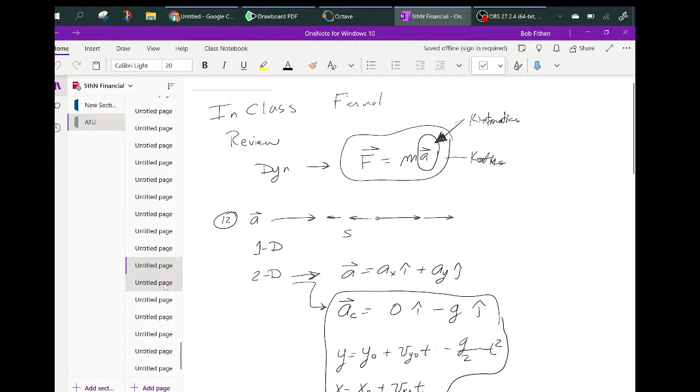The review had to do with centroid and moment of inertia. That's what the last two problems on the online final were about. I just haven't been getting that concept very well yet.

Well, if you go to... let me turn this on. There are some videos. I did a couple problems, and I did one the other day.

There is an integration on there, isn't there? I think there's one integration on the online final. In the book, he does them one strange way, which is okay, but it's not what you were taught in Calc 3, or maybe Calc 2.

So it turns out they're the same thing. Was it last lecture or the one before? I did one where I did it one way, then the other way, and it essentially was the way he would have done it. But you can flip them, so you could do dx dy or dy dx. You just have to be careful which one you put first.

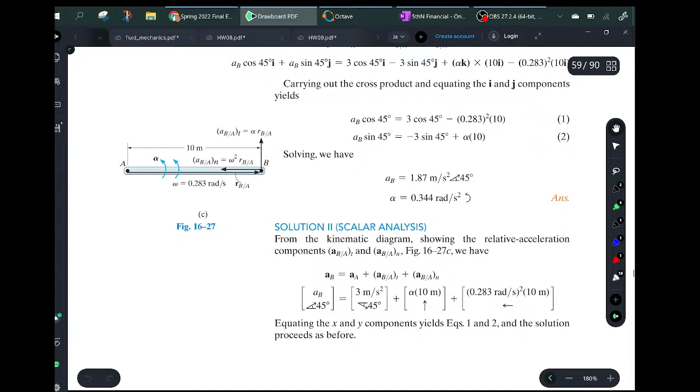So that's the way I'm going to structure it. Structure it so that, for some people it might not be fun if you're willing to take a break and think about it. So what I'm going to do is I'm going to kind of go through the whole thing. Let me see if I can find it. That's not the right one. So I'm going to start in chapter 2. I'm not going to do chapter 1, that's just units. So I'm going to start even back here.

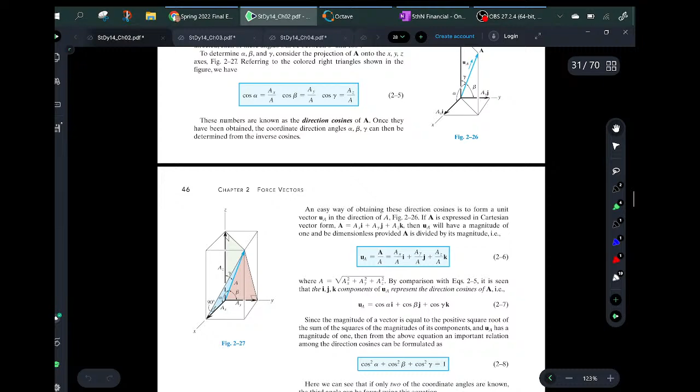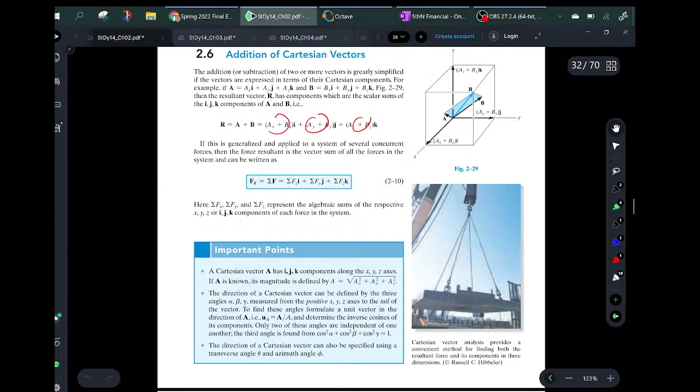Stuff like that, and just, if you look back, that's the thing where you find a vector, you find its length, you do all that. Now, you use that several times later, and in addition of vectors, that's embedded in sum of the forces equals 0. So there's no reason to ask a question about that.

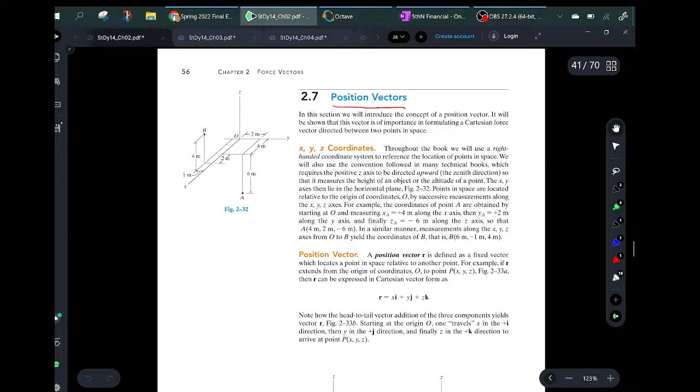So if you look at it, just a couple of these problems, most of them, I'll probably be stuck on a length, because like that, there's your position vectors. There's the length of a rope, that's more natural. Here's a rope. Well, let's see, how do I get that? Oh, you have to do the pin. You get all that. So he's got this thing set up.

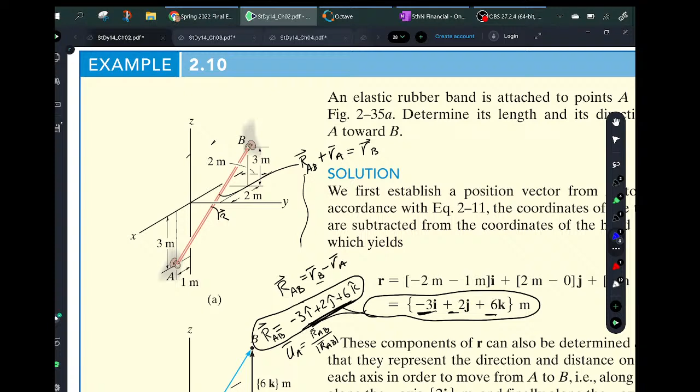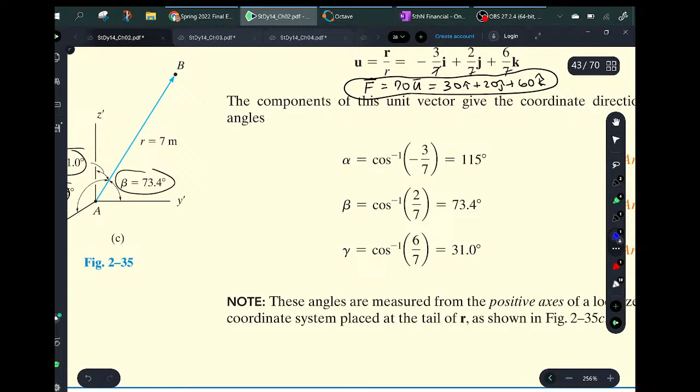So essentially he's got a rope stuck between a couple spots, something like that. I may ask the question, what's the length of that rope or something? Or if that is a rope, it looks like a rope to me. That might be. But then he's got all these other things. I might ask some angles, the alpha, beta, gamma. Then of course you can open your book.

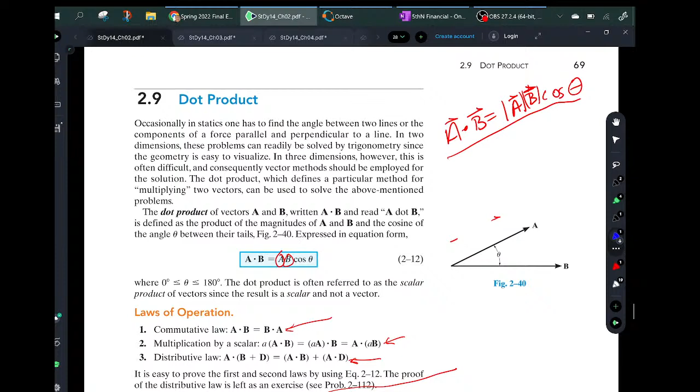Forces along a vector, that... I don't know, that's subject. I may do that, but I'm not sure exactly. But then you get there and that's pretty much it. There's a dot product, which I don't know, I might ask something, but instead of doing dot products the way he does it, I might do it a little bit different.

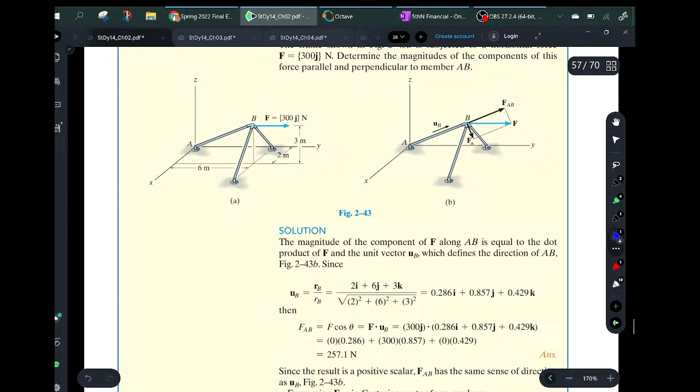And then you go, let's see, chapter 4, what's 5? I'm sorry, that was chapter 2, then chapter 3. Chapter 3, I think, is the first time he does some of the forces. So, you know, those are pretty good problems in a sense. You could go down here and do...

Something like that without springs, maybe. There's probably one down there without it. I don't want to do springs. There you go, something like that, something similar to something like that. But again, instead of asking the thing and everything, just pick one. I might just pick one, have you go through it and go on.

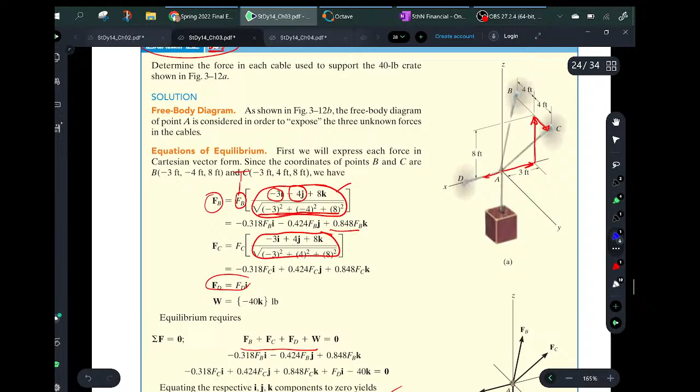With that, not sure I'm going to do three-dimensional systems. I don't know, I'll think about that. I'm going to make the test between now and next time, so that at least I'll know what I'm going to put there. Maybe I'll kind of come back and mention a little bit better.

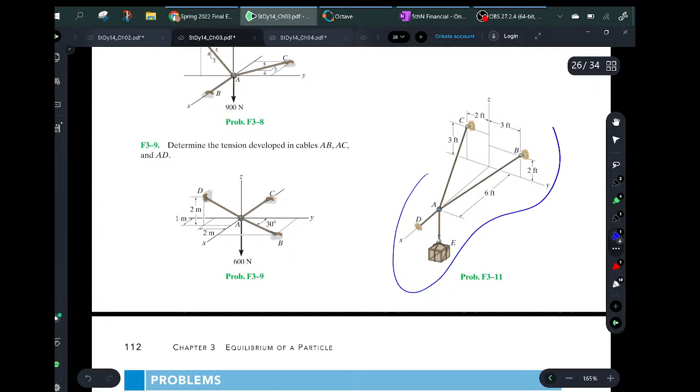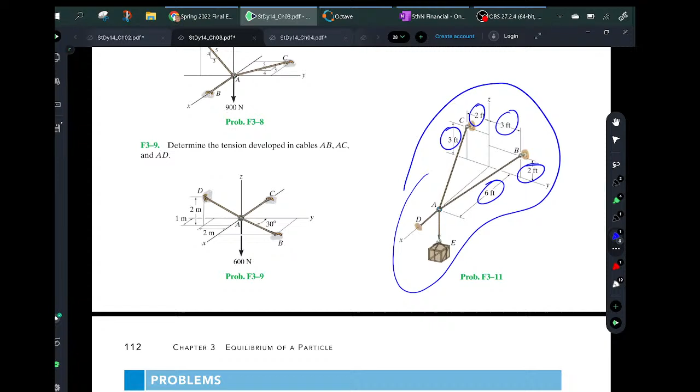But some of those aren't that bad, especially if you got something like this, especially since that's 2 and that's 2, and that's 3 and that's 3, and that's 6. It's just a shifting of numbers, so it's not that bad. Now, if I went in and did really oddball numbers, that could be not so fun.

I don't know, I like these bucket ones, but of course this one's on the other final already. Okay, except this is a rod, because I had to make it a rod, because sometimes it's in compression, and you can't do that with rope.

Did you get it though finally? Yeah, I eventually got it. Realized that we had to find the unit vector for each one of those.

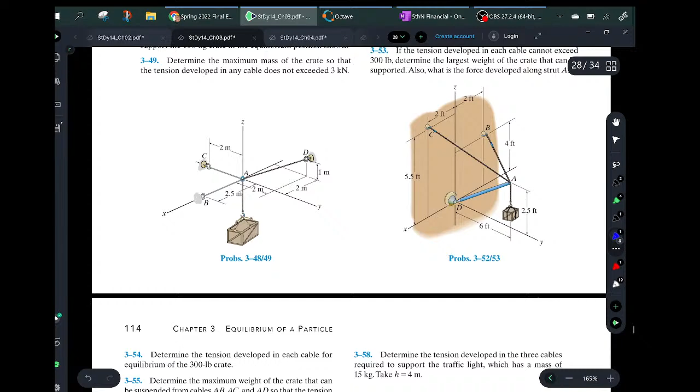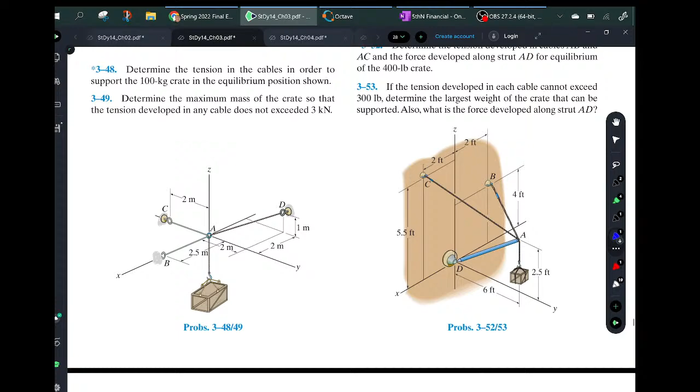And that's the goal here. The only reason I'm doing this final is that I basically said I don't know, and I don't want it to hurt anybody. So there are people who will not need to come take it, and if they don't, that's okay. There are some people who will not need to take it but will come anyway, and if they score a bad grade it's not going to hurt them. Actually, it can only help you.

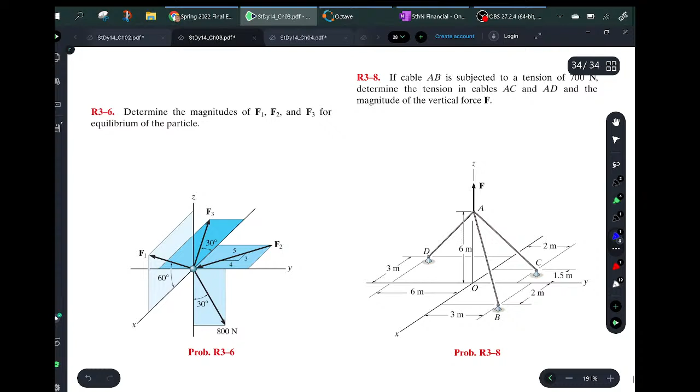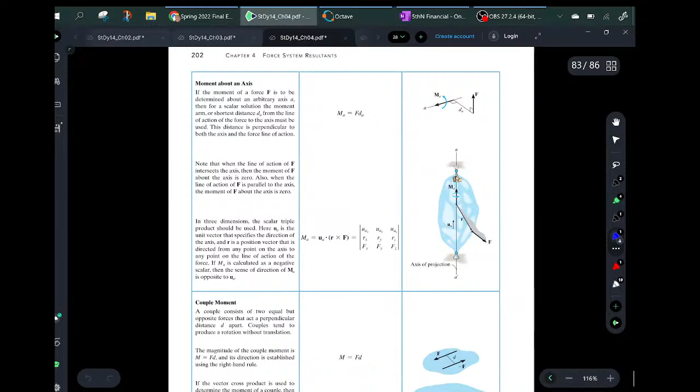So this is all of that, and then the next one's moments. The moments could be thought of as hard, but I'm going to approach them like just a simple case. Okay, so apparently I'm at the very end of that chapter.

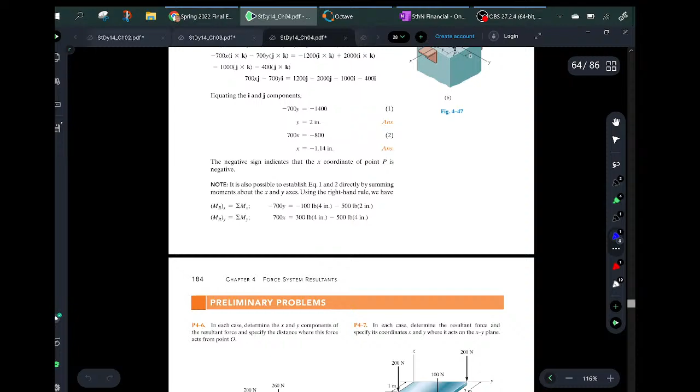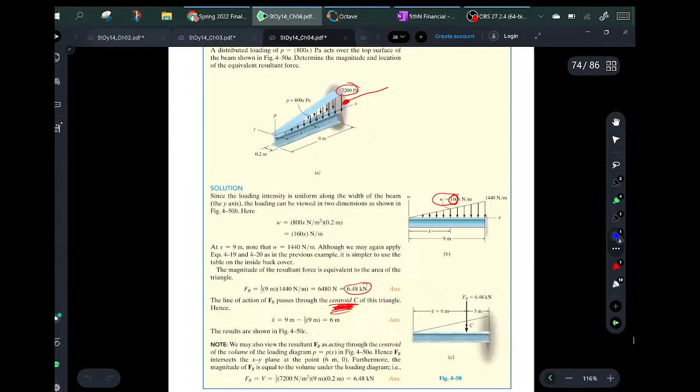Here, let me drop this keyboard off. The thing is, he probably should put them in a single location, but if you look, here he's not doing any of that. He's just telling you where the loads are.

And then I think since we're in 4, I'm going to try to see if I can find 5. I need to, I'll tell you what, there it is. I'm going to put the 5 and drag it right under the 4. If you go to 5, and of course I'm going to have to go back to the top.

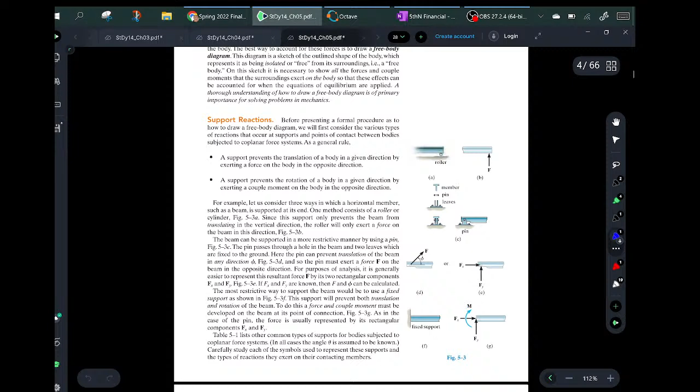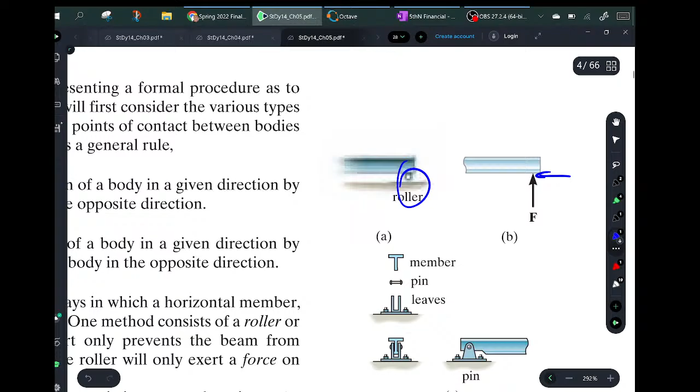So he starts with this free body diagram thing, and these are the types of forces you can have. So if a roller's sitting there, it will only roll left and right. That's a terrible picture, so it won't produce a force back that way, but the pin will. So he's kind of leading to this here, the support reaction.

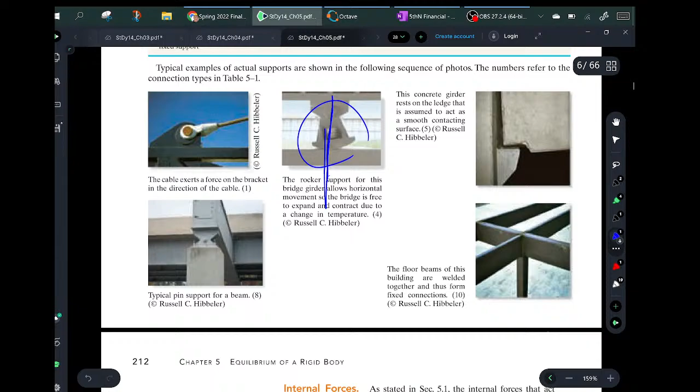Then he goes through how each of these get supported, and that's probably a good thing to look at and review. Like there's a little rocker - if the beam moves to the left, and it obviously has a little bit, then the rocker just rocks. It's basically just going to make it so the force goes straight up through there.

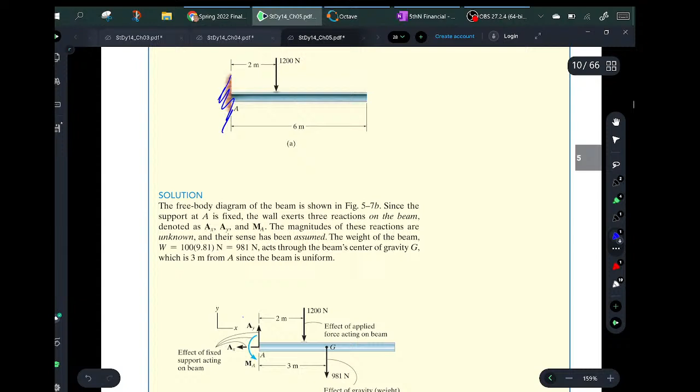So then you get down here, he talks about this, and there's where he starts. Now this is the first one where he's like, okay, I do a free body diagram, meaning I cut the wall out and replace it with the reactions that occur at the wall. Now I need to find what those are.

And to find what those are, you do the sum of the moments about some place equals 0, the sum of the forces in x equals 0, and the sum of the forces in y equals 0. And you'll notice, it's kind of weird that he does this way - let me go to the next one, because he probably starts doing it here.

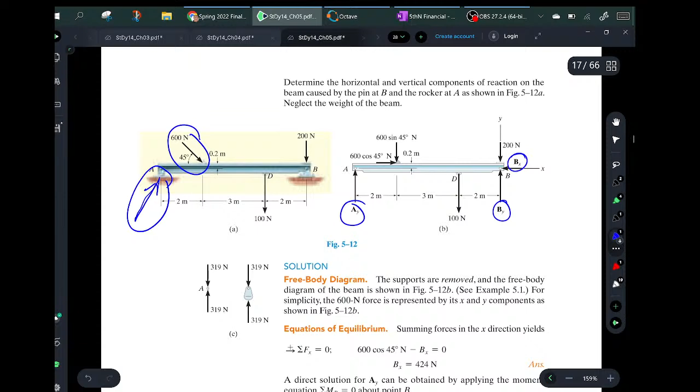And of course what he's doing here is he goes ahead and breaks this down to its x and y components. And then he says, okay, I need to know this, I need to know that. So then when he comes up here, first thing he looks at, it looks like he's going to go for the x one. And when he goes for the x, you only have that force, and you only have that force. So he has this one, and then he has this one going in the opposite direction, and that gives you the B reaction.

It looks like I got it. Well, it looks like his next step is to sum the moments about B. One advantage there is that if you're summing the moments about B, then these two forces don't produce a moment. For that matter, that one doesn't either.

Well, wait a minute—he is giving the distance here times that. So it is on the little top. So what he says is 100 times 2.

It's 100 times that 2, the 6 times 5. Let's get this, this times... 6, or should be 5. Oh, I'm sorry, that is 5.

So he's got that for the moment. Then here's his little bitty moment arm. He takes this one times the 0.2. The 0.2 is that little distance right there. And then this is this little part right on top of the beam.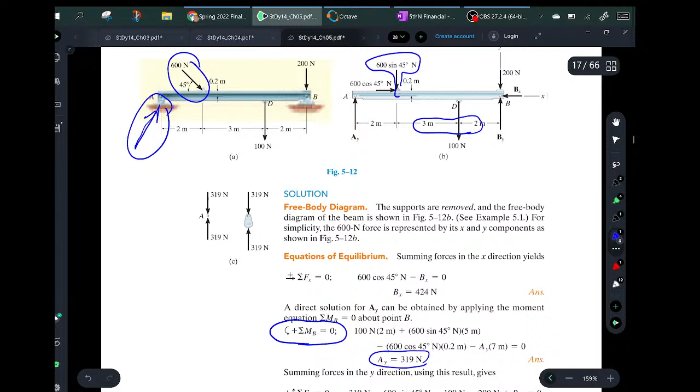So you just use sum of the moments to find the reaction forces on it. Right, okay. You can actually do sum of the moments about one spot, and sum of the forces in X and sum of the forces in Y. That gives you 3 equations, and you'll notice he has 3.

Now you can actually kind of trick it and replace one of them with the sum of the moments. In other words, if I sum the moments about A, then one of the unknowns is B. This one doesn't show up because it's right in the center. So you can actually sum the moments about A and get the solution for BY.

Then you can do like he did—sum the moments about B, and as a solution you get AY. So you can use sum of moments a lot of times. You don't always have to use sum of the forces.

Sometimes if you're clever—and that's why I was talking about pausing for a minute to take a look at the problem and ask, wait, what am I doing here—you can figure out how to solve it another way, plus you can use that other way to check it, by having two different ways to find that force.

And so that... where it asks for a certain point, it's like to the left, you go to the right.

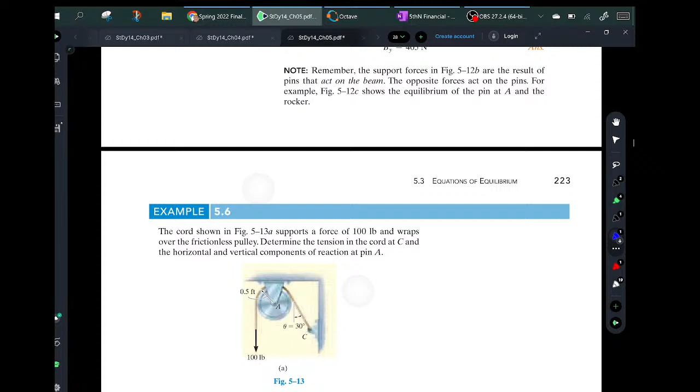I need to determine those because I've gotten them wrong every time. Oh, okay, now that's in chapter...

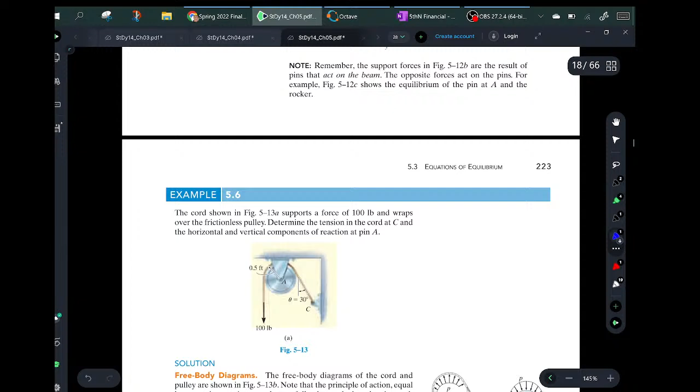Let's go to that one. Let me think about what chapter that is. Okay, wait a minute, I'm going to try to line them up again. There's chapter 6, okay, so chapter 7. Wait a minute, you can't use your finger like that, apparently. There's chapter 7, so let's see. I'll put that right here. Then chapter 8—I don't think it's chapter 8, but I'm going to line them up anyway if I can find them. There's chapter 9 and 10. Anyway, I think I'm going to skip 8. It's in there somewhere, but let's see if I can find which chapter that is.

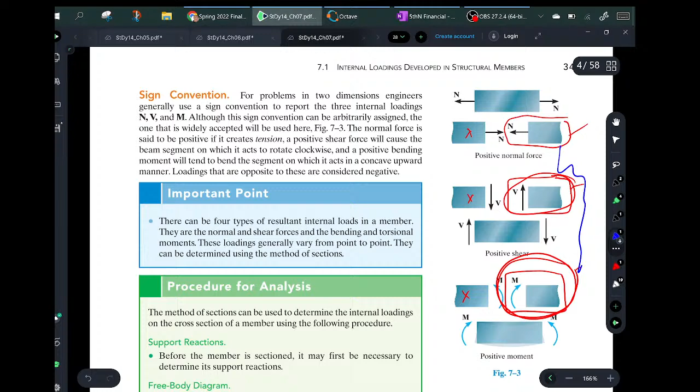That's the trusses. This, I believe, is it. So the way this works—okay, so first there's this weird sign convention, and that sign convention sticks with you because of mechanics of materials, and you'll find that out later. So you just want to keep that in mind.

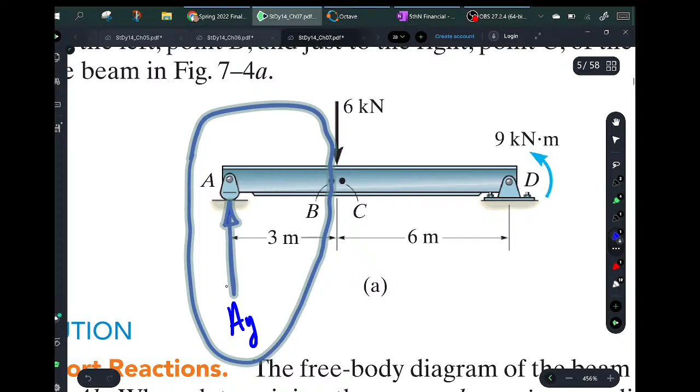So for example, in this one, if you're looking at B, B is just to the left. So what he's going to do probably is come in and find that load, AY, and then he's going to take the problem and slice it. Just since it's just to the left, you don't have anything there—there's no load.

In other words, let's say I'm going to cheat and find out what his AY is—so his AY is 5 kilonewtons. So here's your AY, I'm just going to say 5 kilonewtons. And then let me get that keyboard out, because then I can snip it. I could snip it without the keyboard, but maybe I'll try that. Here, let me just snip it without. I think we'll do this one.

Okay, new—here's what I'll do. Come in here. And so if you snip it just to the left, you don't see anything there. And then you can go in here and just go right there. Well, now I do need the keyboard. Okay.

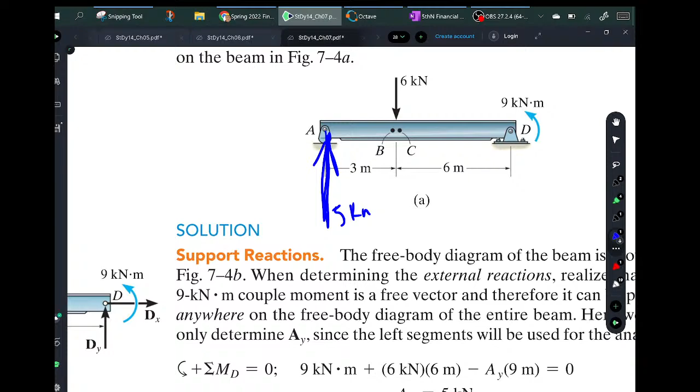And so now you're going to have to find the shear. Now, if I go back to the book, I'm going to try to be very official, and say I'm looking at the left end. The left end positive is pointing down. I'm going to point that down. Here, change that, point that down.

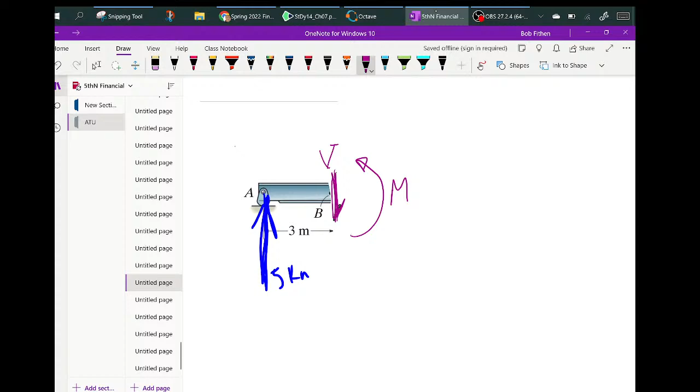I know the moment is positive here. And then I know, wait a minute, I just want to double check. Positive here goes to the right.

So first of all, if I look at this picture, sum of the forces in the X tells me the normal is equal to 0. Sum of the forces in the Y tells me that this V, there's no other force but that 5 kilonewtons, so that's just V is equal to 5.

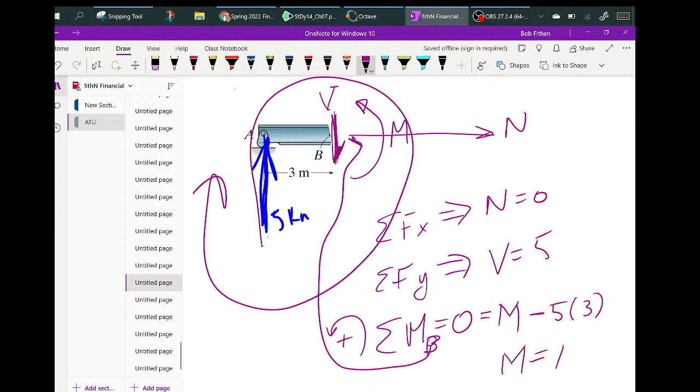And then sum of the moments equaling 0, but what I like to do is sum the moments about the point that you sliced. If I just do arbitrarily that, then I basically have M, because that's that. And this doesn't produce a moment because it's right there, and neither would this. So the only thing I get now is 5 kilonewtons going this way around B, which is opposite of positive, which is 5 times 3. So moving that around, I get the moment equal to 15.

So I get this equal 15, this equal to 5, here equal to 0.

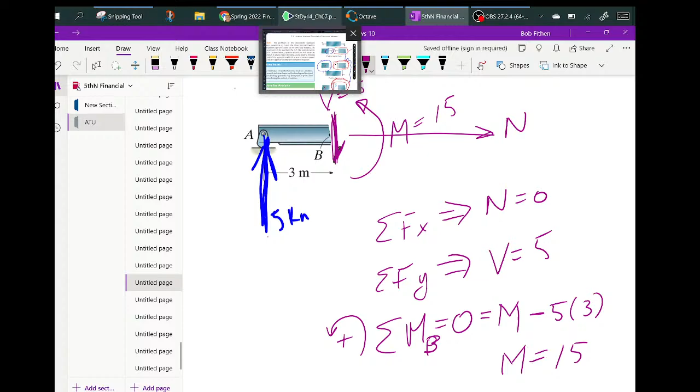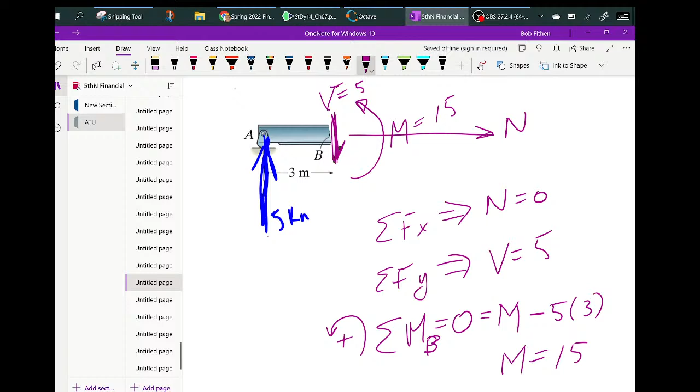Now let's say I came back to the book, and this time I want to know the one to the right. So if I want to know the one to the right, I take my Snipping Tool. This time I have to include that force because it's to the left. Then I go back over here, I can slide down a little bit, take my new picture, and say okay, now what do I got?

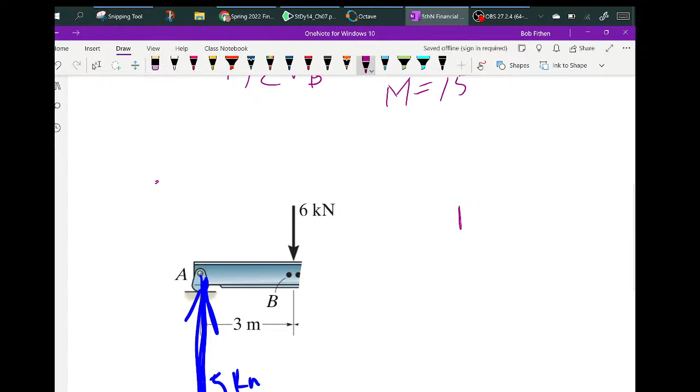Well before, let's see, there's nothing new here. The normal is still going to be equal to 0. But now, okay, so here's my shear, and there's my moment. Those are both positively defined.

So sum of the forces in the Y equals 0 tells me I've got 5 minus 6. I got 5 up, 6 down, and then V down. And suddenly I realize I got V is equal to minus 1.

Is that right? It's 5 minus 6. I get minus 1 minus V is equal to 0. So I can move it. Yeah, so I get that.

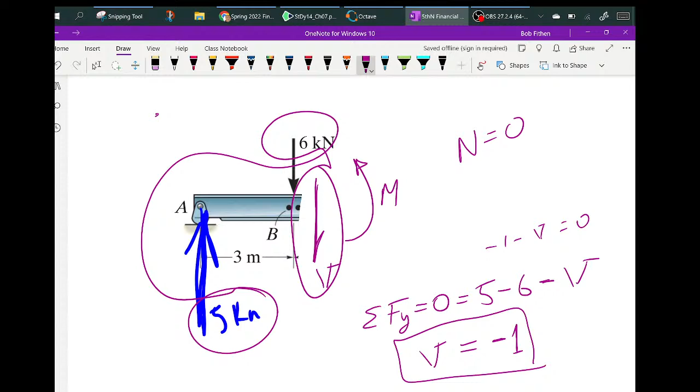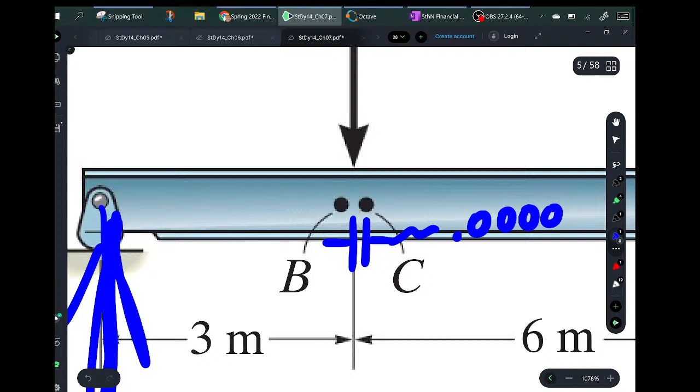Now here's the trick. When they're saying this in the book, they're kind of saying the distance from here to here is kind of like 0.00001, you know, something so small that it's just slightly there.

So what that means is when you go to sum moments about that point, which now is C, I think that's point C now. So when you sum the moments about C, this 6 kilonewton doesn't produce a moment because it's so ever so close to C that it's not there. Does that make sense?

And so then what you get is you still get, believe it or not, the same answer you did in the one before. You get the M if you define this as positive, then you get 3 times 5, and that's just 15. This doesn't produce anything, so you still get the moment equal to 15.

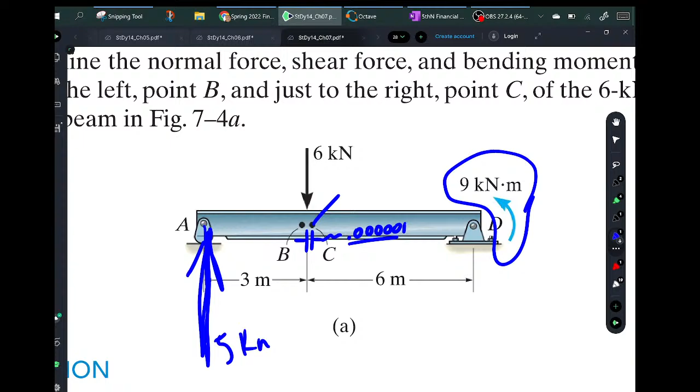So if you look back, let's look back and see if -- oh no. Oh, okay. All right, so that moment on that end did affect this, but I cheated and I went down and I picked that up.

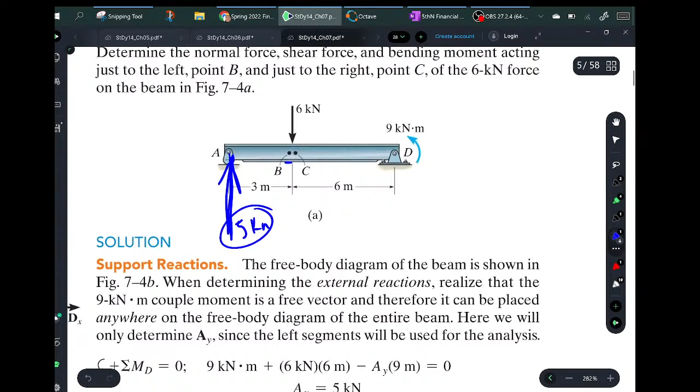Here's what I mean. I said, oh no, because of this. If you look at the support reaction, what he does is he goes in and says, what's the moment about D? He takes the moment about D.

It is true there might be a force here, but he says 9 this, 6 times 6, minus A times 9. There's your 9 and there's your A.

So since I copied that, but the reason -- in other words, if you turn this 9 into 90, say you turn that 9 into 90 and you start increasing it, the more and more and more you twist, the higher this load's going to become, if you think about it.

So I said, oh no, thinking oh no, I didn't see this, but I simply copied the AY off of here.

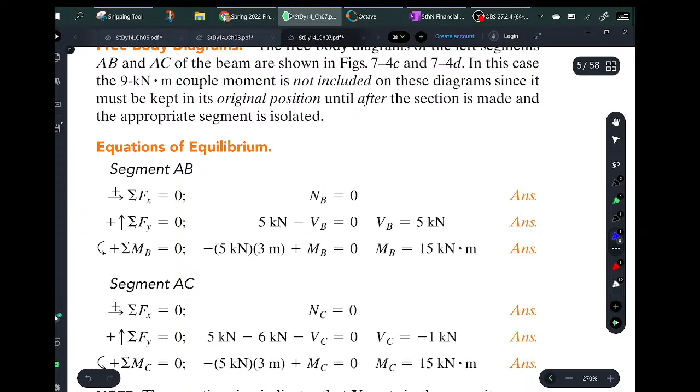So the free body diagrams, okay, segment AB. So here you get the VB, and then this. And notice what happens: segment this, it's -1, but the moment's still the same. And of course, this is never anything because nobody's pushing it.

So, does that kind of make sense?

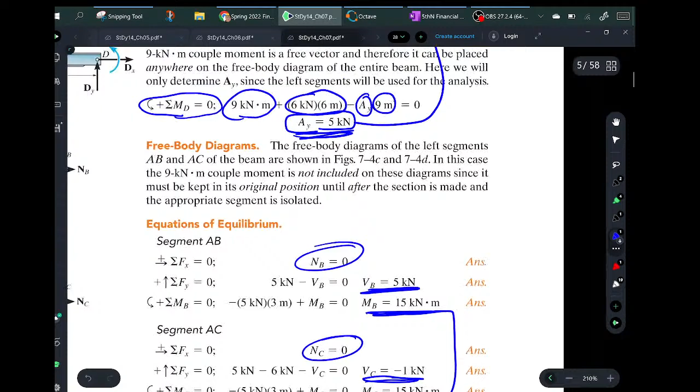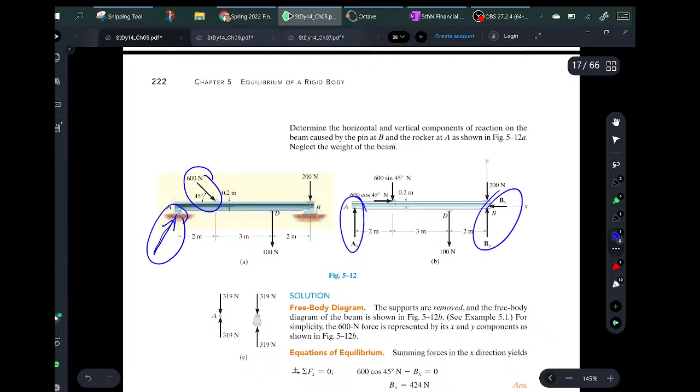If you go into chapter 7, he's spending a lot of time on internal reactions. The previous one we looked at was chapter 5, which tells you how to do support reactions. Once you figure out the support reactions at 5, then you can go to 7 and do the internal stuff.

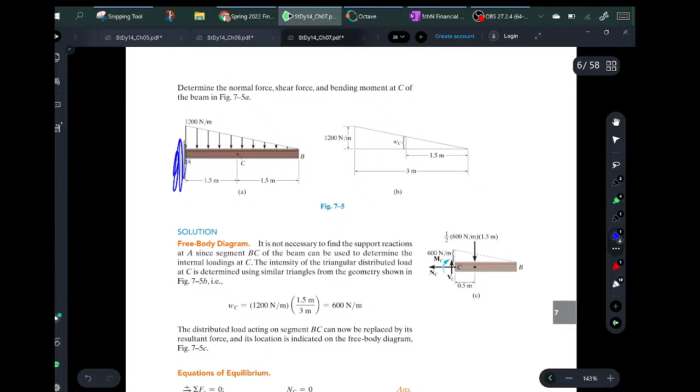So what you notice is all of them - for example, here he removes the wall and replaces it with his rendition of what's positive. This is the one area in statics where you've got to follow the sign notation. The rest of them, I can sum the moments equaling 0 about some point and make that positive or that positive, and that's true. The difference is you've got to draw them in these particular ways because you'll find out later in mechanics of materials that that's really important.

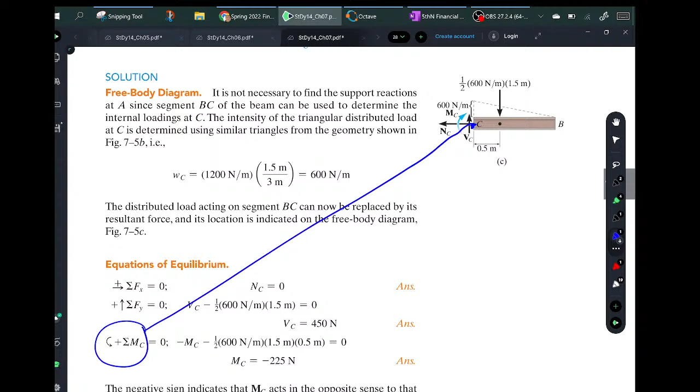So then what you do is get rid of the supports, replace them with the load, and then, like he's doing here, sum the forces X, Y, and then the moment about some place - usually the best place is where you're interested in finding the internal load. It could be labeled, this time it's labeled as C. Other times it could be labeled as something else.

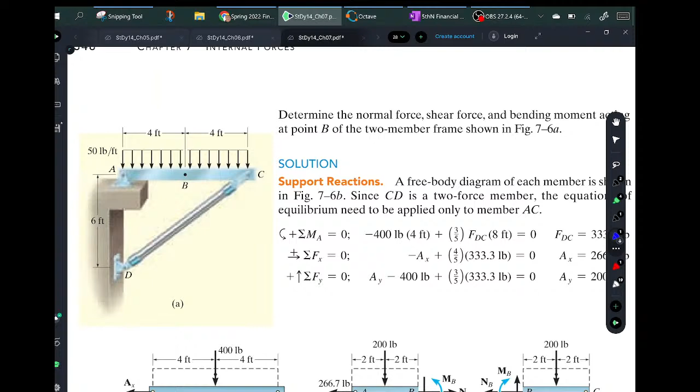So here he's probably interested in finding out the load at B. First thing he does, he finds the support reactions, so he's going to be looking for the load here and the load here. This is kind of unique because this little support bar can only push this way if it's pinned in there. Once he has this, you can do - and this is a good rendition here.

So he's wanting to know the internal loads at B. You could do either this or that - you don't have to do both. Whatever you find out for MB here has to be the same here, and this has to be the same as here, and this has to be the same as there. You notice in either case they're all equal and opposite reactions. In other words, this point to the right, that's point to the left. This is twisting this way, twisting that way, going down and going up.

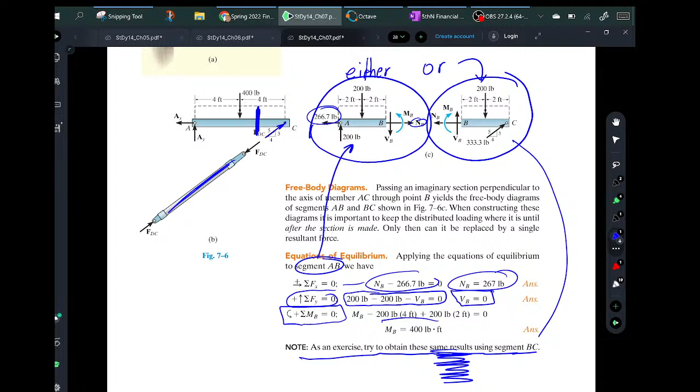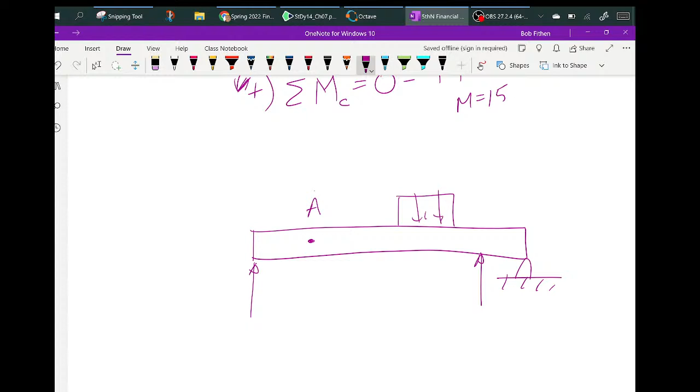Let me think of a random case. Say you had this, then this, then a force here, some kind of support here, and the reaction here, and somebody said I want to know the internal load here. If you find this reaction load and slice it, the left end looks like this - and you're like, hey, this is really good, I like this. The right end looks awful, has a whole bunch of stuff on it - a load here, some funny load here, some distributed load here. Then you've got to include all these, there's more calculations on this one. The left end doesn't have much, so you can make it easy or hard depending on which end you pick.

But either end you pick, you should get exactly the same answer.

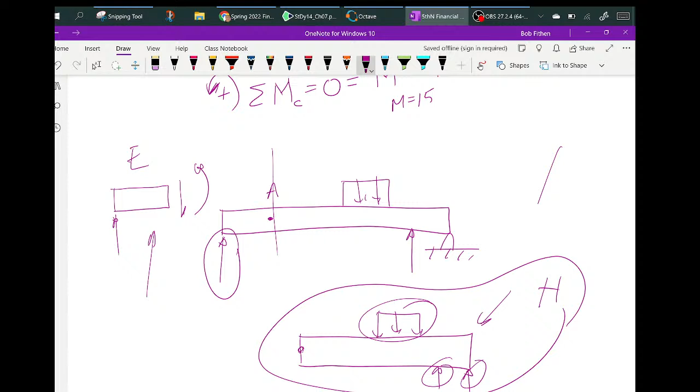It's kind of cool because almost all of these, I'd say in statics at least 50% roughly of the problems, there's a couple ways to work it, so you could always check yourself. Now saying that and doing that is two different things, because sometimes you want to work it quickly. It may take 30 minutes to calculate it the long way, so you may not have time, but if you have time, that'll take a lot longer. This is really quick, so it just kind of depends.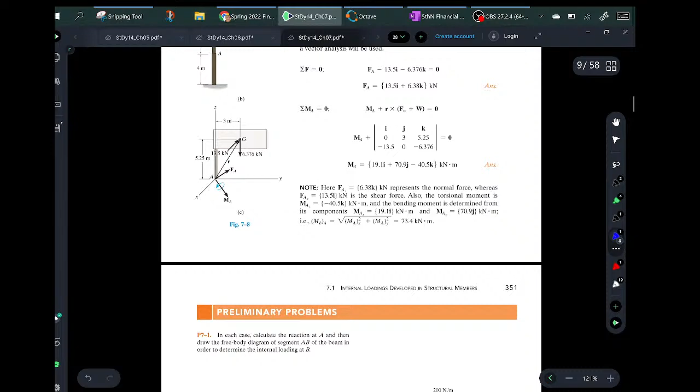So I'll probably ask something about that. And most of these, you'll notice something interesting: usually it's either a completely distributed load, or triangular, or a combination.

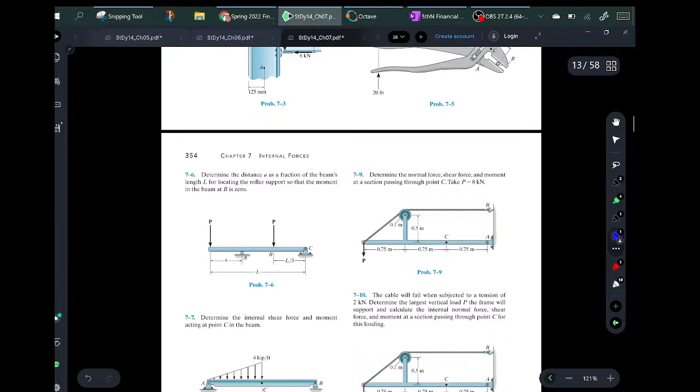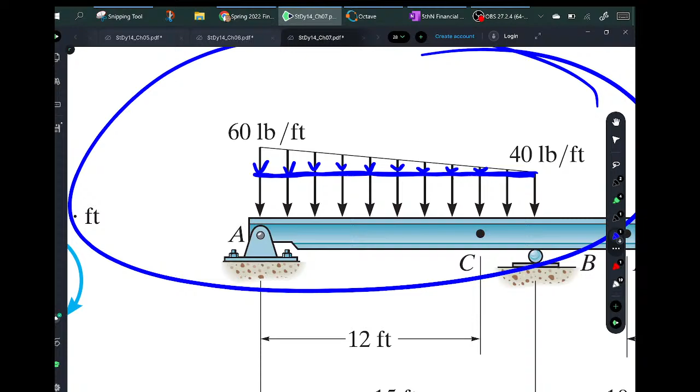And that's about all he's got. He's got some funny, weird ones here. That's actually a combination one, because if you zoom in on it, you can make it out - if my handwriting allows - you can make it a triangular one on top of just a constant one. And so that's a combination. Most all of them are that way. That's a combination too.

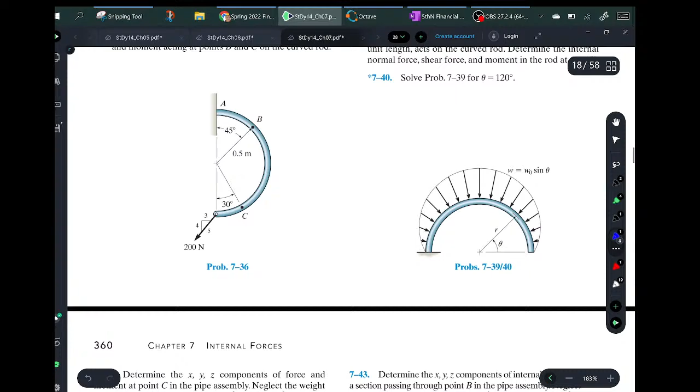I don't see anything that's not either flat or triangular that I've seen so far as I'm scrolling. That I don't even want to think about.

So long as you know the property. Yeah, did you get that one? Yeah, okay. Yeah, and see, that's the thing.

I threw that one out there. The only reason I put that one on there is to make people go back and look at doing the integral, and then that would actually make you think, okay, I think I made it quadratic, so I had a constant term, a linear term, and a quadratic term. If you think about the linear term, it's like a triangle. If you think about the constant term, it's just a constant - those two together are kind of what's in here. The only reason I added the quadratic is to put people in a position where, okay, I guess I'm gonna have to integrate this. And when they integrate it, at least they possibly saw where it came from and can go on from there.

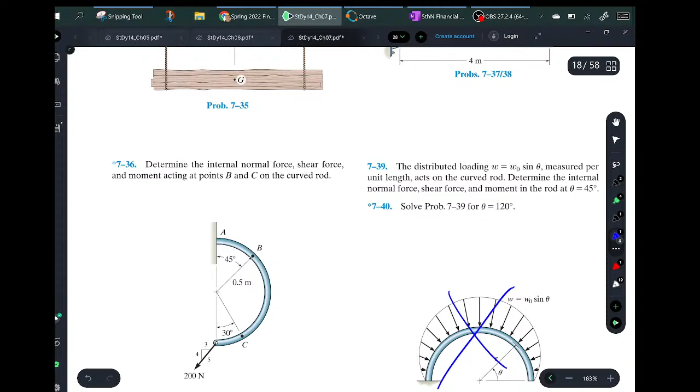Yeah, so it was kind of trying to be educational in a way, but it wasn't necessarily. And since I was given 5 tries on it, I thought maybe you would learn a little bit by seeing a little bit of it. But in practice, that's probably not what you're going to see. You're going to see, more than likely, a constant one or a linearly varied one.

That's just nature. Even if you fill up an aquarium, if you go fill up an aquarium - believe it or not - you got water in here, it turns out the load is exactly linear.

If you look at a spillway, it's the same way. You build a spillway here with a big huge pile of bricks, and you got water back here. What's happening is the deeper you go, the more pressure there is. So this is a linear profile, and you really can't - unless you do something really bizarre, like add an extra push or pull down there underwater - you can't get anything but a linear profile. So that's what it is, there's nothing more to it.

So really, constant profiles are pretty easy, because if you're laying a bunch of concrete on top of an I-beam, like out on the highway - usually, I haven't seen, I'm sure there might be somewhere, but I haven't seen anywhere where the depth of concrete they pour varies - maybe it's like 12 inches thick all the way across. So that means it's a uniform amount of weight, so it's an equal load on that beam.

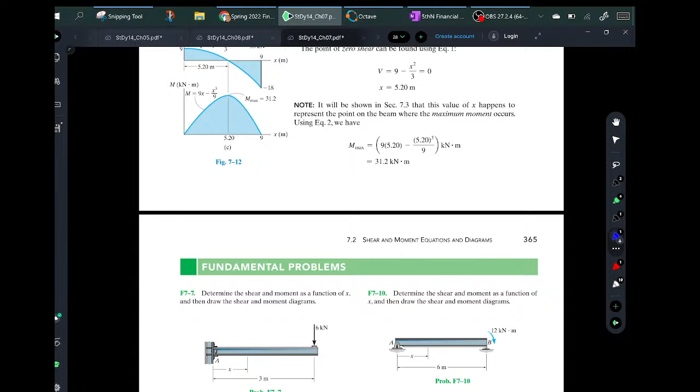So let's see, that was 7. So you said now 8 is a little bit of friction, and there was a problem or two on that, but the problems on friction were pretty easy that I put in there. Yeah, the friction becomes more of an issue.

Okay, you'll go into mechanics and materials after this. And then after that, I think you go into machine components. I think there's a little bit in mechanics and materials on friction for belts and stuff, but there's more in the course after.

So the course that we're looking at, if we just get the concept of, a box sits there and it's across, say this is carpet, and you already know when you're moving furniture, it takes a little bit to break it free. And if you oil the floor or you put something down there, it slips around real crazy, but you know that there's a friction.

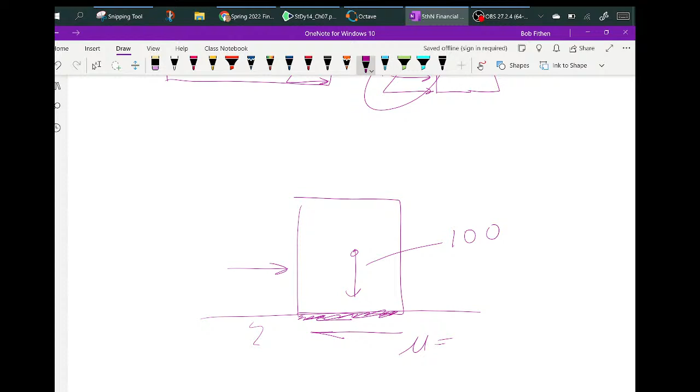Well it turns out, dry friction is just, if this is 100 pounds, and this might go up to 50, but they have this coefficient, say it's 0.5, then this is your normal force. You sum the forces in the Y, you get 100 pounds. And so the maximum that you can get here is 50, which is that number times that number. But you can put 25 pounds on it, and nothing happens. You can't move the furniture. You push it, push it, push it, and then finally it breaks free and you can start pushing it across the floor.

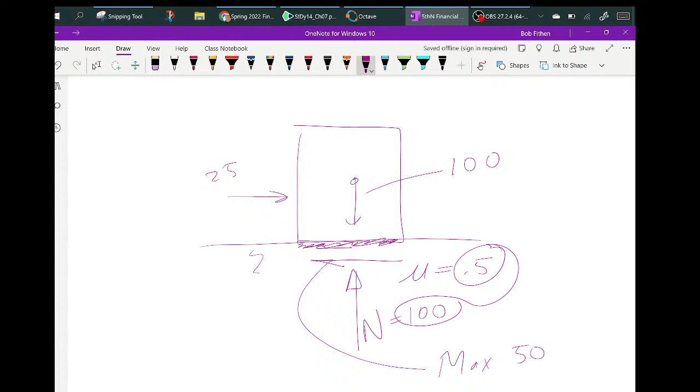So in a belt it's similar, but the difference in a belt is, say, the belt could be wrapped around here, and I'm not doing a good job. So there'll be a tension in this pulley. The belt may be spinning, and so it'll be touching all of this surface here, and it'll be wrapping around.

And so what you're getting is, I'm doing a terrible job here, there'll be a normal force tying it on here, and there'll be a friction force that keeps it from slipping. And if it starts slipping, that's when you sometimes smell the thing burning, or you hear it squeaking, or something like that. That's a lot in machine component, and I think they cover that a lot, and a little bit in mechanics of materials. So for us, if we just learn the basic concept, that's pretty good, I think.

There's more detail later on. So I guess they're all coming out of there, so they're probably gonna try to get us out.

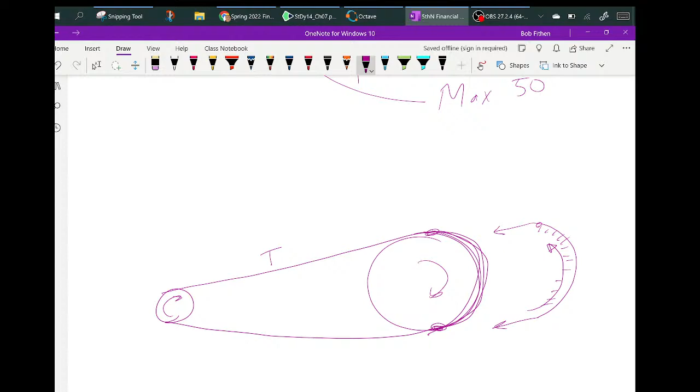And that takes us to the centroid, and then the moment of area, and that's pretty much it. And I didn't say much about the moment of area, but that's used a lot in mechanics and materials.

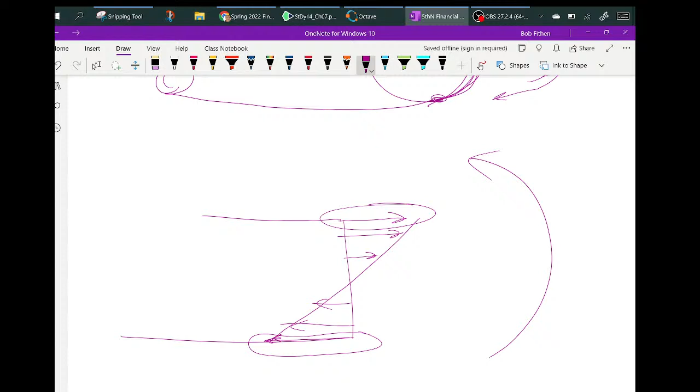And the reason that is, because it turns out if you take a beam and you look at it and you say there's a moment there, and there is internally, it turns out that the way the moment shows up is through a distributed load that looks like that. And so at the very top it's the maximum, or the very bottom it's the maximum.

And it turns out if there's a dude standing here looking at it, say it's an I-beam, you might see this. Oh, that's ugly looking. But it turns out there's more area here and a little less area here. So it turns out in the equation, you'll see, let's say IXX, you'll see this term for stress. And it turns out that's exactly what that is.

You'll find that out. And in mechanics and materials, they'll say, okay, I want to know IXX. It turns out MC over I, where C is the distance, that's going to be your stress that you see back in this funny drawing right here. And so you'll see this equation. It turns out that that's the term that goes underneath there.

So in other words, think about it like this. If you take a beam that is a long, slender ruler, like that, you push on it, it's going to bow a lot. But if you take that ruler and turn it sideways, I'm not doing a good job here either with my drawing, it becomes stiffer. You push it this way, it's really stiff.

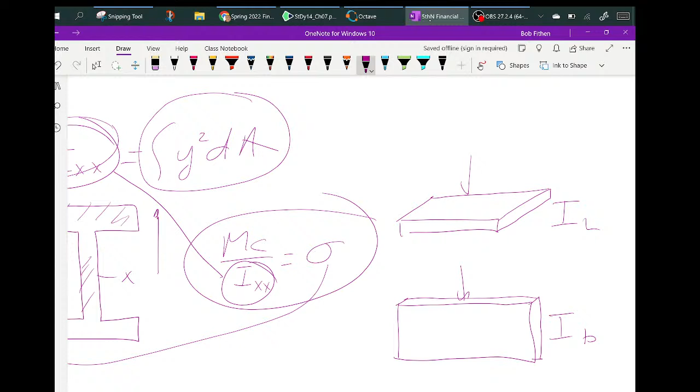This is the way it's been for years, but I wish there was a little way you could jump forward and back and jump forward and back, but so I guess we better go because I think they're going to want to get this. So that's all I'm going to do. If you have other questions...